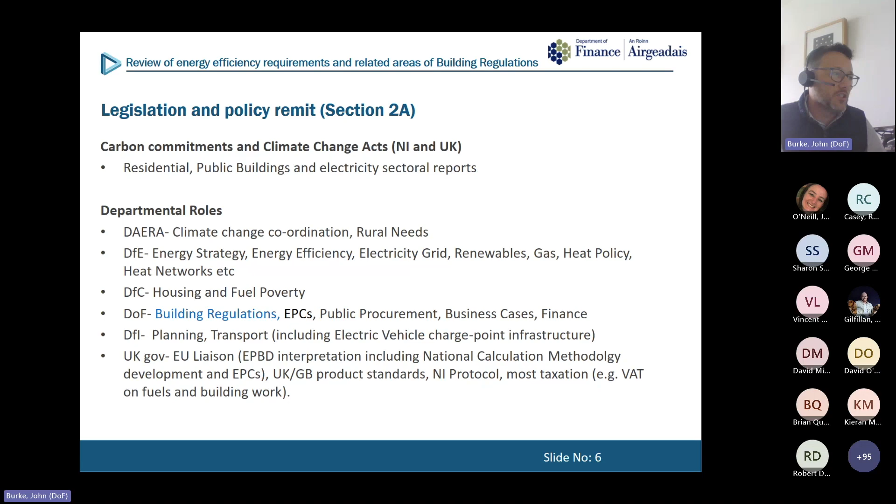So we sit in a kind of mixture of all of these policies and influences, and I think it's really important that that's appreciated by people when they expect building regulations change to occur. So our legislation only applies when building work is being done. That's a really important thing to remember. We don't require work to be done to bring a building up to a fitness standard. We don't require retrofit of a building to be done. What we require is, if you are doing work, that work is done to a certain standard. So that's a really important aspect of building regulations. They're not there to require existing buildings to be brought up to scratch. They only apply when building work is being done.

The remit is set by the primary legislation. So it's, again, standards which can reasonably be attained, and they usually set general functional requirements to be reasonable or adequate. And then the definition or the expectation or examples of what reasonable or adequate looks like is normally provided in the technical booklets. And those technical booklets form the day-to-day guidance that most of you, I expect, are familiar with.

Finally, they've also implemented aspects of the Energy Performance of Buildings Directive. That's a bit of legislation and that's been implemented via Part F. And some aspects of this are still to be provided, for example, a primary energy target, and they stem from an amendment to the directive made in 2018. But ongoing EPBD compliance into the future is no longer a requirement for the UK, having left the EU, and we don't expect that will be a requirement that will be imposed or applied here. So that's an important kind of thing.

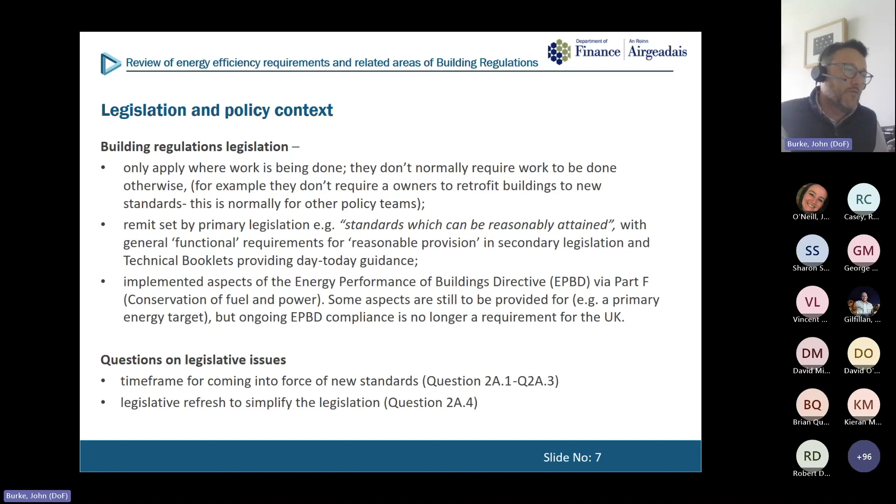So we have a couple of questions on legislative issues that I wanted to just take a couple of minutes to explore. They are the time frame for the coming into force of new standards and the issue about a general legislative refresh in light of those changes from the EU. So moving as quickly as I can, England applied quite interesting transitional provisions so that its new regulations came to apply to all new applications made after the regulations come into operation. So that first line is kind of normal. If you make your application after the new regulations come into operation, the new standards apply.

But the interesting difference with England's last amendment was that they also applied it such that all building work not commenced within 1 year of the new regulations having come into operation, whether the plans were previously submitted and approved or not, would also be subject to the uplifted requirements. So it didn't matter that you'd made your application a year and a half ago and finally got a plans approval. If you hadn't commenced your building within a year of the new requirements coming into operation, then you're expected to meet the new standards.

Now, that was done in the context, we believe, in England, where there were things like large site-wide applications being made for estates of houses, and provided one of the houses had commenced, that was the application commenced, and so the 200th house or whatever years later was still able to continue through the process under the first application, the standards from many years previous.

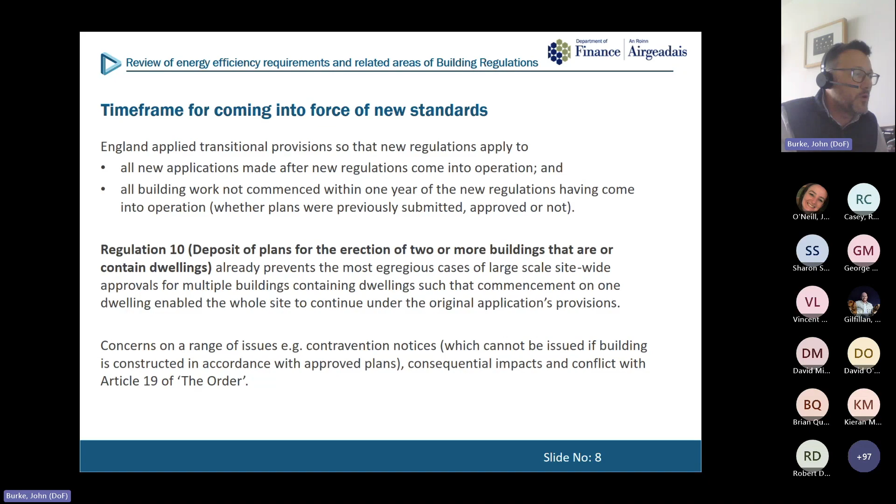So if the plans were approved 2 or 3 years ago but are only now commencing, then there could be difficulties there. We also think there are consequential impacts, and there's a general conflict with Article 19 of the Order, which I'd hope to come on to. So Article 19 of the Order, which is the primary legislation and sits above the secondary regulations themselves.

Article 19 of the Order makes it clear that district councils have the power, if the work hasn't commenced within 3 years of the receipt of the deposit of plans, to declare that the deposit of plans shall be of no effect. So effectively, if you make your deposit and then haven't commenced the work within 3 years, your application is void. You have to reapply, and that has been quite a straightforward concept.

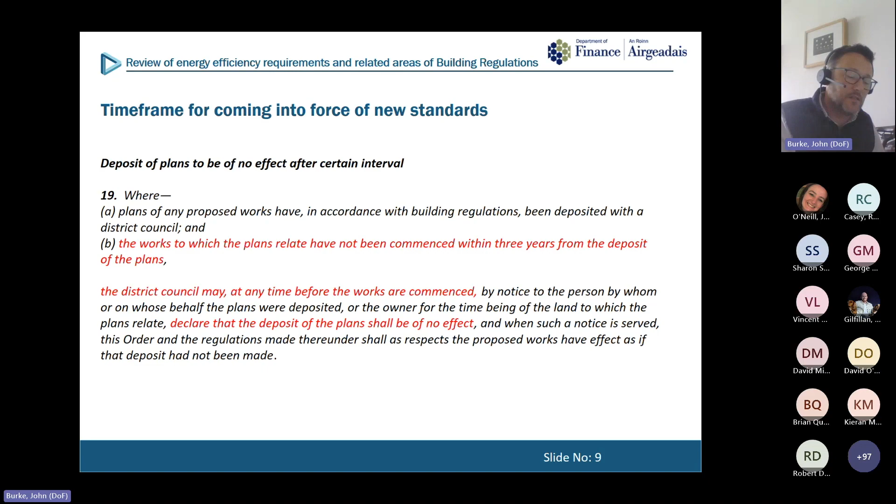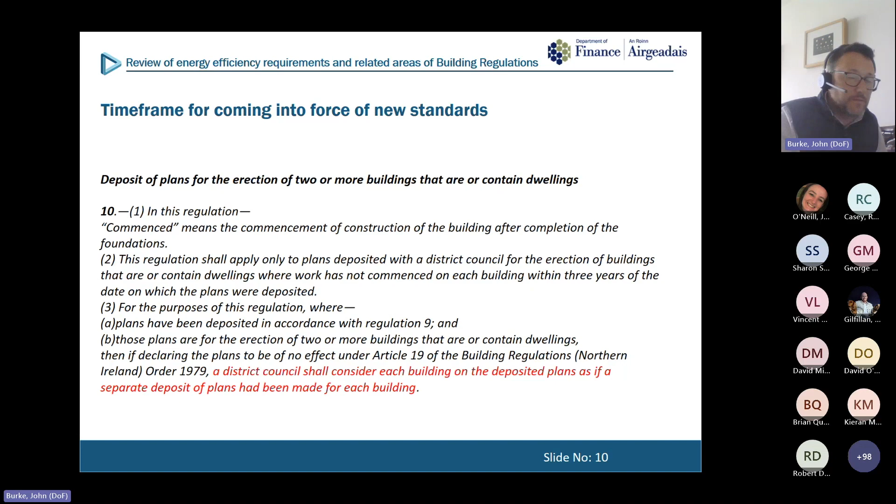And we're concerned that transitional provisions, as they were implemented in England, might conflict with this process. It would seem somewhat odd to have those two levels of legislation in conflict. And similarly, as I've said before, we've got this previous position under Regulation 10 that each building which contains a dwelling is considered a separate deposit for the purposes of Article 19 at the minute in any case. So we feel that gives quite a bit of support or protection on that front.

So our proposals in the document, which we're open to receive comment on, are that we should continue on the basis that we have, so that applications submitted before new regulations come into operation can continue under the standards that applied at the date the application was made, but that would remain subject to commencement within 3 years of the application. However, we would be open to considering if this 3-year time period should be reduced, and if so, to what. So we've asked questions around that, and we'd be really interested in your comments.

Similarly, we've had a bit of a look, and we think that there's a fair bit of scope for some legislative refresh on the regulations themselves. Particularly, there's a number there that come in through the EU and the various layers of EU, and the need to demonstrate a very rigorous transposition that is both fulsome but hasn't had any unnecessary gold plating has tended to lead to some slightly eccentric or complex wording in the outcomes.

So examples of that, if people have time to look at them, are Regulation 43A, consideration of high efficiency alternative systems, and Regulation 43B, nearly zero energy requirements for new buildings. In effect, they're requirements that now apply to all new buildings. So we don't really see why you don't just have standards for new buildings rather than explicitly taking out that wording. So we think that there's room for a kind of clean up on some of these issues.

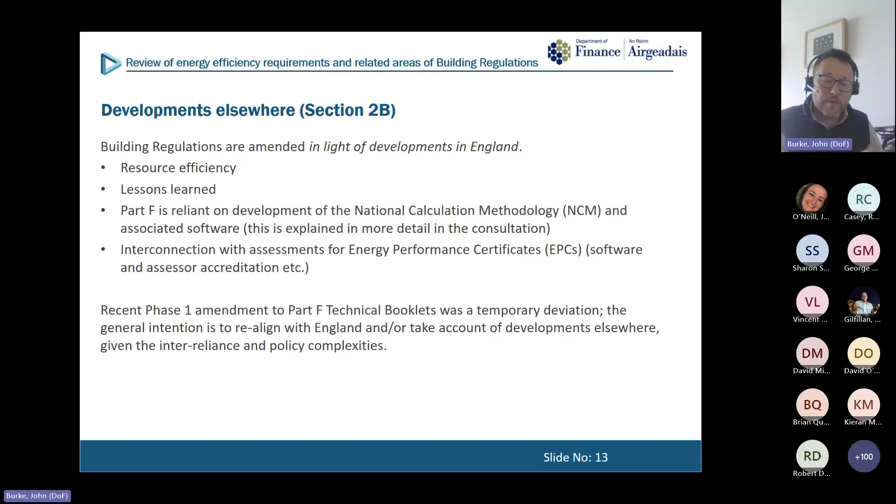The recent Phase 1 amendments that we made to Part F technical booklets really were a temporary deviation from this. It was in light of a need to do something urgently. It's not really a long-term or sustainable position to go off on our own track. And the intention is to come back and realign with England, or at least take account of England and the developments elsewhere, given the extent of the inter-reliance and the policy complexities that come, so we think it's important to emphasise that.

So we have some general questions then in section 2B that follow up on that, where we're trying to be sensitive to our local conditions. We note that it can be difficult to compare the actual performance depending what metric you use, whether you take account of local weather data and things like that, whether you have absolute figures. There's quite a lot of scope for variance. So we're interested if anyone has done any research, or if there is a true comparator that industry or academics have done to benchmark, using a rigorously consistent application method, buildings which would comply in the different administrations and how they perform.

We think that would be a helpful thing for ourselves to know, and to see what's actually been built as well. We'd also be interested in the characteristics of our local market. We outline in the document how we tend to have smaller developers. We obviously have a much higher level of reliance on oil, home heating fuel. We've got different ways of looking at fuel poverty, but we think we've a higher level of fuel poverty here as well. So we're asking about these issues, and if there are any other issues that we've missed in that filter that need to be considered.

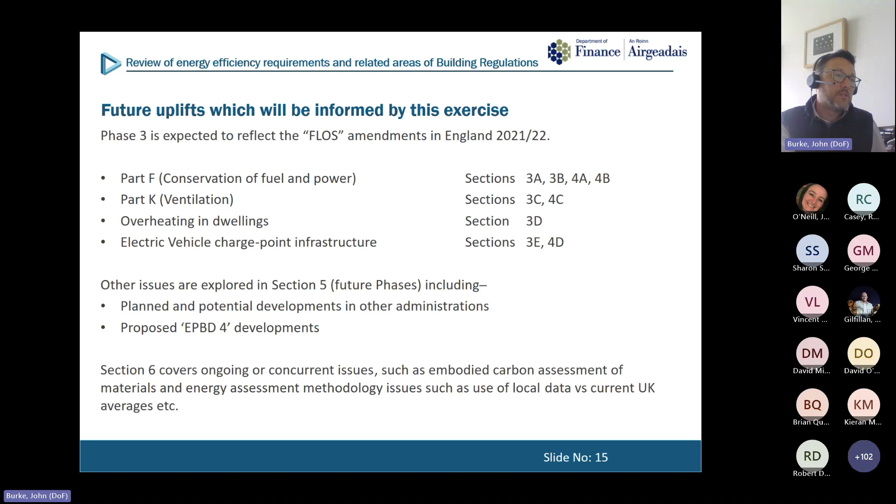Section 5 of our document looks at longer term developments, and section 6 looks at some of these concurrent issues that might be considered either in the longer term or alongside improvements in operational energy performance and improvements in the methodology.

So broadly, of course, phase 3 is expected to lower operational emissions in terms of Part F, conservation of fuel and power. Phase 3 is expected to lower our operational emissions, really start to significantly move us away from higher carbon fuels, improve energy efficiency of new buildings and update the standards where work is carried out to existing buildings, and make use of the new energy assessment methodology, which has come through in SAP 10 and SBEM version 6, I think it is, in England, and adopt those as they've now come through, and now that they're available, we can see what the impacts of them may be here.

So within that, however, under pressure from some of our colleagues in other departments and other places, we're also seeking evidence as to whether there might be an option to take some additional time and to develop proposals with the effect that new build homes, so this is dwellings only, would be limited to only very low carbon heating solutions. So there are two options in relation to homes. One is to broadly follow England or the other administration approach reasonably closely. And the second option would be to take a more radical step, take some more time, see if it were possible to develop an approach where we have an expectation of only very low carbon heating solutions.

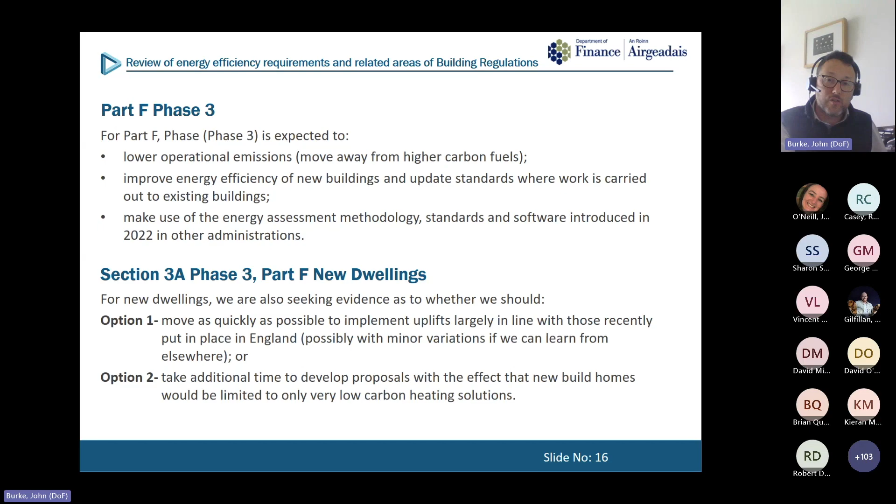With that in mind, there are two notional dwellings proposals in the document. So you'll see this table. I don't know if you can see my arrow, but this black column at the header is the existing kind of specification that we think would be a compliant specification that would work and would meet the current requirements under the last uplift that we introduced. And then what we have here are the proposed notional dwellings. It is the same fabric, and actually it's the same lighting standards as well for both options.

But one is a building which should be heated with mains gas and have wastewater heat recovery, and would also have photovoltaics on the roof. And that's in line with the option that England has adopted. So that would be a follow England approach, the light green, and it's option 1. Option 2, the darker green, is a heat pump led solution, and it aligns with a specification that England provided in Appendix D of their technical guidance, their Approved Document L1.

I mean, we have to say, please don't underestimate the challenges in any of this. There are huge challenges in option 1. One is obviously the removal of fuel factors is a big thing, so that even dwellings using a fuel worse than gas would now be 100% compared to gas. There would be no relaxations or fuel factor allowances which currently exist, which would effectively make it really very difficult for home heating oil or similar high carbon fuels to be used. And so that then has a fuel cost impact because the lower carbon fuels seem to be more expensive to use. So that's a really significant issue.

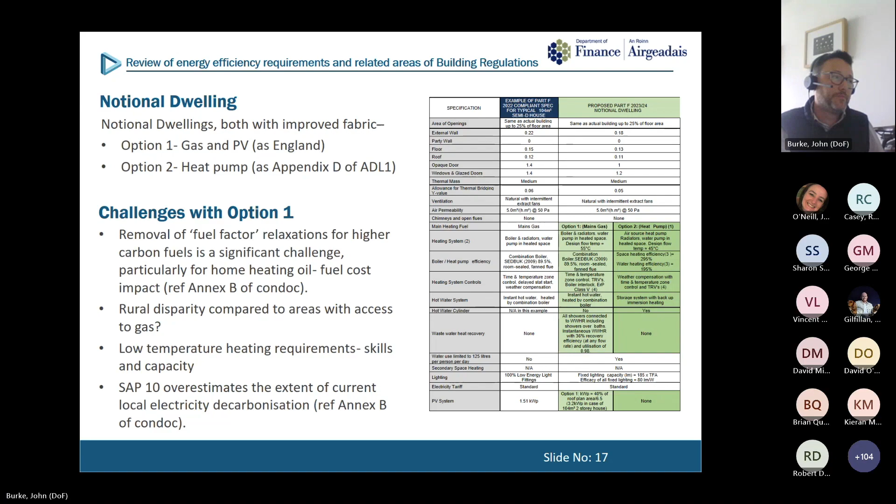So there are similar issues with option 2, but many of them kind of get magnified, and there are some particularly niggly or difficult problems that we would have if option 2 were to be taken forward. So obviously you have running costs, because low carbon fuels tend to be more expensive, even if you are running a heat pump. That's what we have found in our assessment anyway. We're open to evidence. CapEx costs, capital expenditure costs, tend to go up as well.

We've an interesting question about what the appropriate specification would be for a heat pump. I mean, maybe there's something there that we need to look at in what we've proposed, so keen to hear what you have. Industry skills and capacity pressures obviously increase because there's more new technology expectation in option 2 than there is in option 1. There are potential grid issues with all these heat pumps suddenly now coming on the market, particularly in rural areas, which would also apply in option 1.

There are contrasting pressures actually with option 1, because in option 1, the high amount of photovoltaics could lead to issues in gaining export back to the grid, whereas with option 2, the issue is with supply to keep the heat pump going, and for that to work whilst decarbonising the grid, so increasing the extent of electrical use whilst decarbonising the grid.

We worry that there could be unintended outcomes if you have a very low emissions target established by a heat pump-led notional dwelling. Will it be able to provide the level of cooling that's needed and still meet the target? Because you now are going to have requirements for cooling under the overheating assessment requirement, and that might, in some building types, in some flats and things, require mechanical cooling if it goes that way.

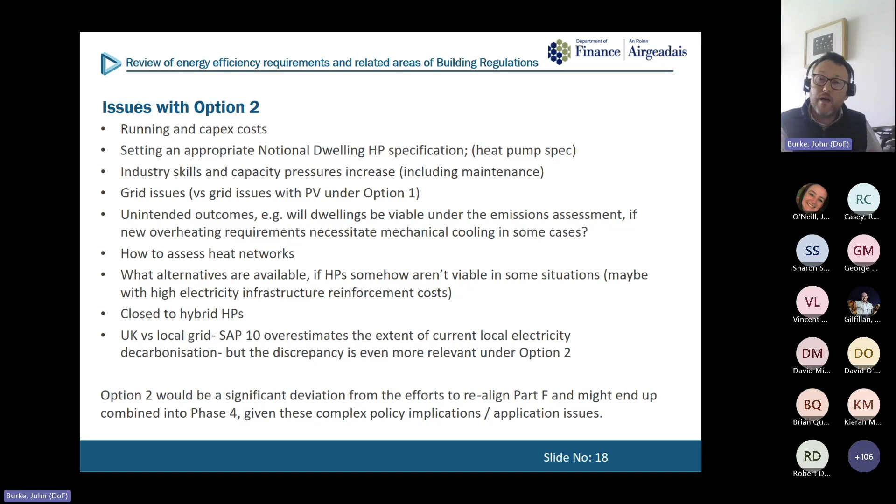So the other point to bear in mind is that option 2 is again a significant deviation from what's already in place in England. So I wouldn't want to underestimate the extent of work that would be involved in deviating away from where England were, or in following somewhere else. The more we can do that, the faster we can implement our proposals, and probably the more straightforward it would be for industry, because they'd be developing on what they would have learned from England, and that involves assessor training, all sorts of things, as well as practical application on the ground.

Okay, so those are the two notional dwellings that are considered. There are also new metrics that would apply across all options. So obviously the emissions metric still remains, your target emission rate and your dwelling emission rate. Obviously, when we adopt the new system, you would no longer need the manual alterations that we currently apply for NI assessments. There would then be a new primary energy assessment, and that's discussed in the document, a fabric energy efficiency standard assessment, a FEES assessment.

So that is really quite rigorous, because it's aligned with the notional dwelling specification, and it's quite substantial. That's quite tough. There are also improved limiting U values and air tightness standards, and improved limiting services efficiencies. We do discuss alternative metrics. So Scotland are looking at delivered energy as an important metric in their EPCs and in their building regulations. Wales, for example, have a running cost EPC band, which might be something that we look at, particularly if we come to look at biofuels and things like that. We'd have to consider that maybe.

And Ireland, of course, have a renewable energy ratio. So we've looked at it, and our thought was that the metrics A to E were sufficiently robust, but we're interested in your opinion on the rest of them.

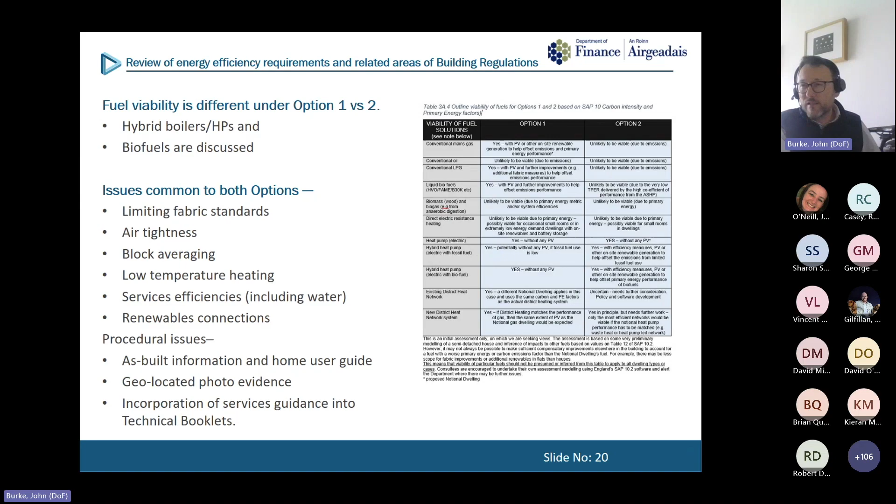So that's as-built information in the home user guide, geolocated photo evidence, and the incorporation of the services guidance, the domestic building or non-domestic building services compliance guide information into the technical booklets. That's all there. There's also an interesting annex, Annex B, which looks at sort of outcomes for a typical semi-detached house. Now, when we develop proposals further, we'll have to look at that at a wider range of dwellings.

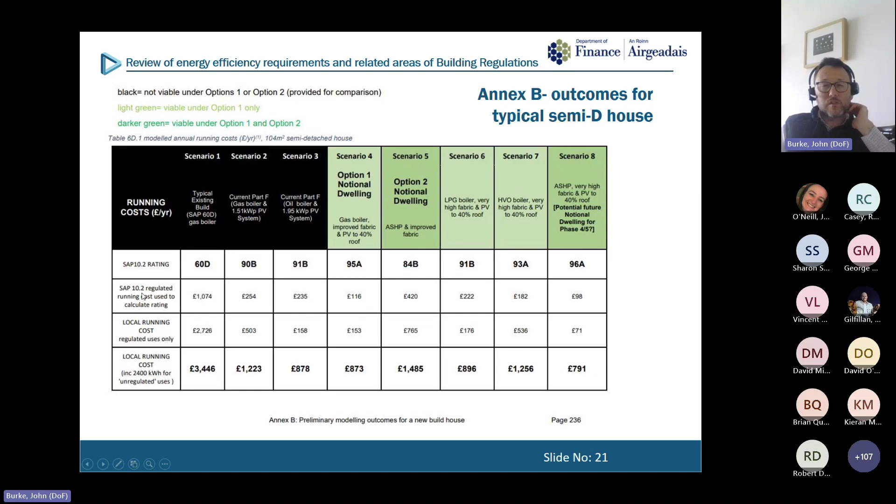And principal to that really is the photovoltaic array, which seems to be the very substantial figure. And scenario 8 adds that photovoltaic array and better fabric to try and bring that down, with the suggestion in our consultation that might be the basis or a starting point or a consideration for a future notional dwelling for later phases, for phase 4 or for phase 5. So that's kind of how that has panned out. But it kind of emphasises to us, I suppose, that the SAP 10 running cost assumptions really aren't quite up there. So we'll be looking at that soon.

So in terms of proposals for existing dwellings, these are much more limited, so it should be a bit faster to explain, hopefully. But if you're doing an equivalent target approach as an alternative way of demonstrating compliance for an extension or a material change of use, you'd now need to build in the fees and the primary energy assessment as well as the emissions assessment. So that would be there.

We're interested in trying to develop a better emphasis or a call for specialist judgment when dealing with traditional buildings and vapor permeable construction. We're looking at an uplift to standards so that new elements would be broadly similar to new build fabric elements, roughly the same kind of outcomes there. There are less significant changes to retrofit standards because we're worried about the risks of unintended consequences from moisture and issues like that. Services efficiency uplifts are there as well.

Big issue would be that replacement heating system. If someone's replacing their entire heating system, not if they're just doing a radiator, not if they're just doing a boiler, but if they're replacing their entire heating system, it would be expected to be installed with a low temperature system.

Similarly, what else have I got here? Yes, the new primary energy assessment. Yes, there would be a new primary energy assessment when you were changing fuel. So as well as the emissions assessment you have to do now, you'd have to do the primary energy assessment too, so that your new fuel that you moved to was no worse, both in emissions and in primary energy performance terms. And that wouldn't be applied where the heat loss of the dwelling was really very low.

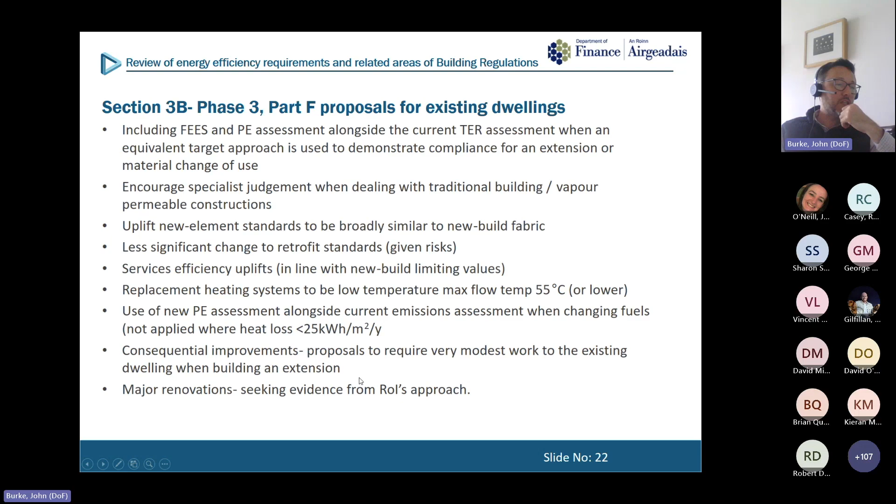We're sceptical on both of these kind of areas, although we do have a set of proposals there to learn from Wales, so that if you were doing an extension to a dwelling and the existing building needed loft insulation, cylinder jacket or cavity wall insulation, then you would really be expected to do that as part of the extension work. So that's been included there, and we'd suggest people look at that.

Moving swiftly on, proposals for non-domestic buildings then. We've got new notional buildings similar to the notional dwellings. However, in this case, we really are just looking at what's out there. We're not even suggesting that Northern Ireland has the scope or capacity to try and develop its own particular notional building, because the outcomes from that can be really very variable and complex, there's such a variety of building types and building situations to consider that we think that it's not really realistic for us to do that.

There is, however, a bit of a comparison provided in Annex D of England, Wales and Scotland's notional buildings, outlining what the differences they have, which are all relatively minor, dare I say, or seem that way at this stage.

We've got, of course, the fundamental change is in what your comparative fuel is between your actual building and your notional building. So a bit like the fuel factors that applied in notional dwellings, if you have a carbon factor worse than gas, you would be compared to gas. So again, in non-domestic buildings, you would find that you wouldn't be able to use oil or higher carbon fuels very easily, and that could be very challenging for you, and there would be similar impacts with primary energy as well.

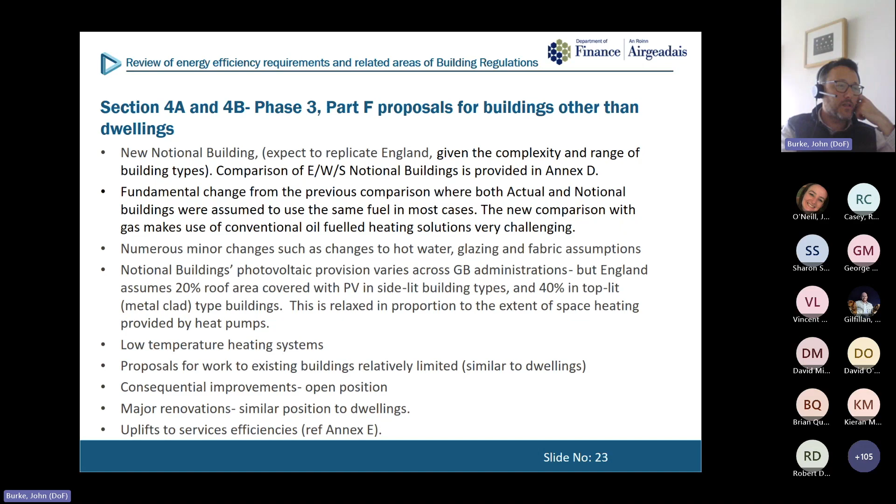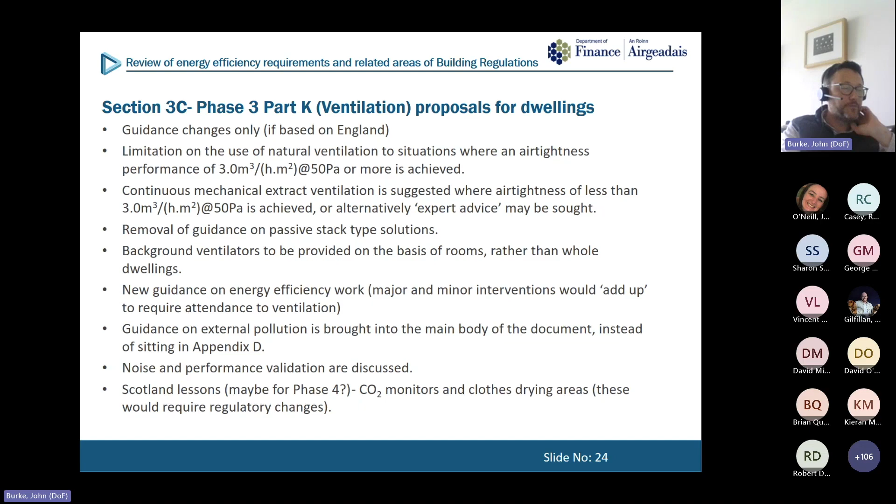And then the other more long-standing measure that they have in Scotland is a more dedicated allowance for clothes drying areas. And with our particular kind of damp and humid environment, with cost of living crisis and people not maybe able to use tumble dryers and things, we wonder if there is maybe scope to think about things. But we do note that requires regulatory change. So that wouldn't just be guidance.

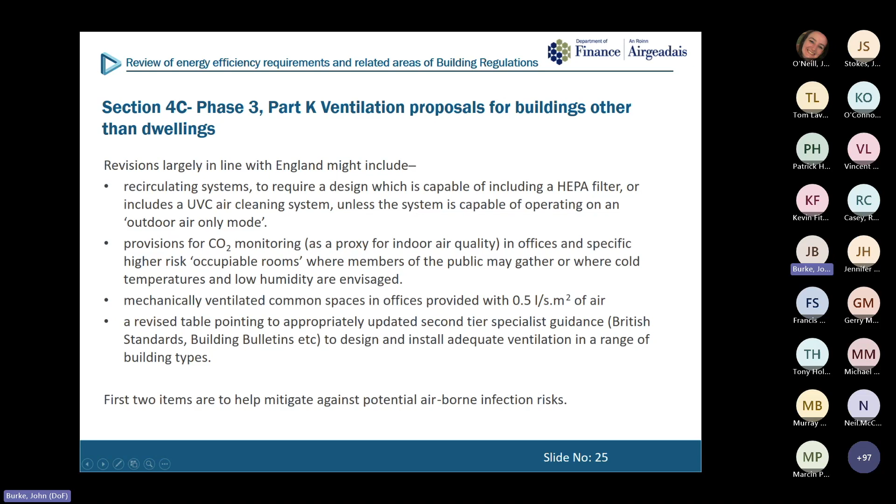Ventilation proposals for buildings other than dwellings. Again, largely in line with England, but this time they're looking more on the health side of things post-COVID. So there's stuff about recirculating air so that it isn't recirculated round and round if there's a particular crisis. So the issue here has been more related to airborne infection and improving the air quality in buildings, and there's a revised table of standards on that and reference to building bulletin documents and things like that. So that's where we're at. That's what's going on in that section.

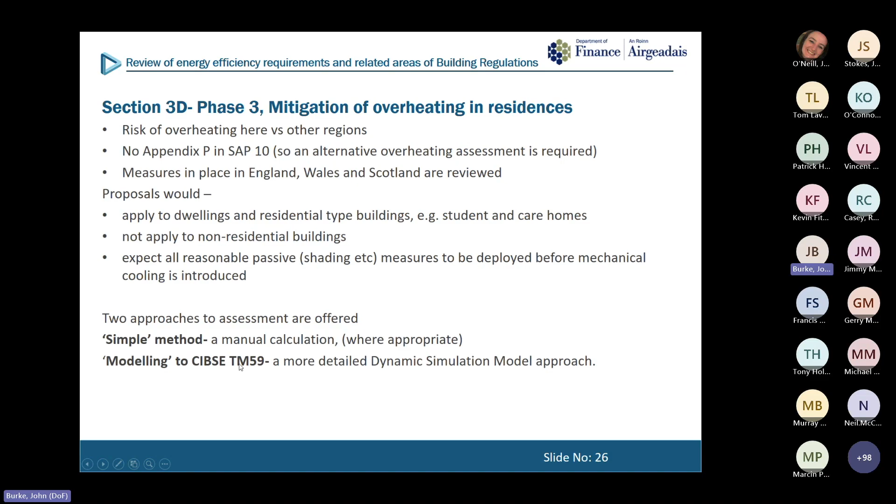Having reviewed all of this, the proposal put forward is in line with Scotland's simple approach, which generally, if you've got a cross-ventilated building and you don't have too much glazing, less than 20% of the total floor area of the room, would mean that you could have openable windows similar to those required for purge ventilation under current Part K. So we think that's a simpler assessment than the proposals that have come through in England. So we're advocating that, and we'll see what the feedback is.

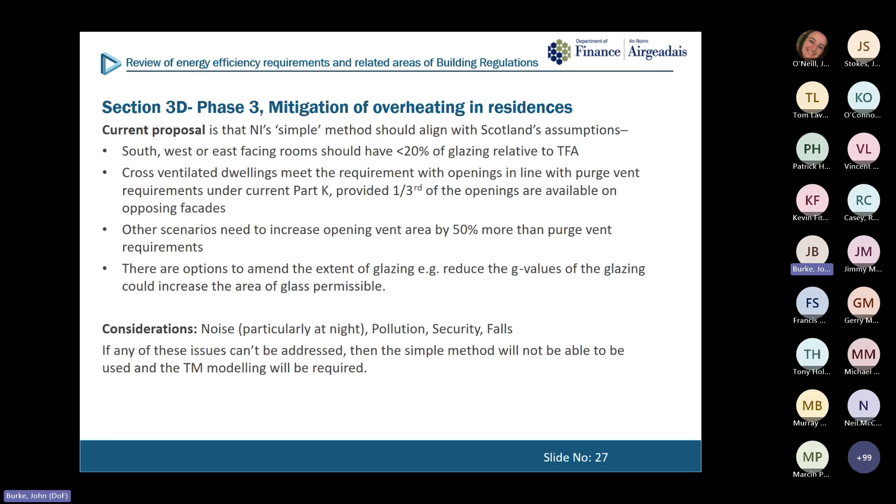The issue though can be the other considerations like noise, pollution, security and falls. And if any of those can't be addressed or are an issue at the building, then you probably will have to use the TM modelling method. The TM modelling method has a criterion A and B about nighttime temperatures in bedrooms and things, but it's quite specialised. So there's quite an onerous effort involved in trying to remodel that and check that overheating isn't a substantial risk or is dealt with successfully and hasn't breached the two criteria.

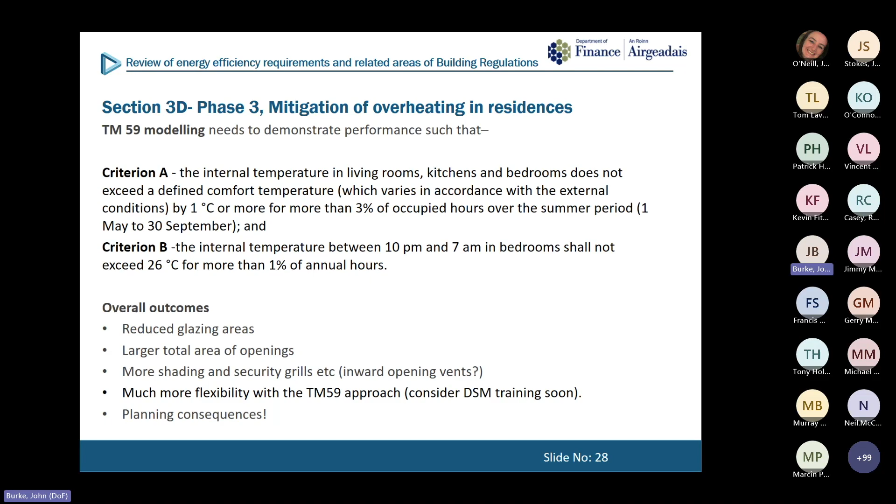The overall outcomes are things like reduced glazing areas, larger total openable areas, so more risk of falling out and things like that need to be watched. More shading, more security grills then to try and be able to get the openable areas to work at night time and things like that. The TM59 approach, from what we're hearing, offers much greater flexibility for designers, so it's probably worth getting the relevant training for that. But there could also be planning consequences. Having got a design or a building to look a certain way, you then find actually that for this to meet these requirements, you have to take other measures. So we're concerned on that point, or raise that point and let you know about it.

There are also proposals in the document for phase 3 in relation to EV electric infrastructure charging. These follow up on some requirements from the EPBD, the Energy Performance of Buildings Directive, which still need to be implemented here. It's really a matter for the Department for Infrastructure, who are leading on it, but other administrations implemented it through building regulations, and the previous ministers were minded to do so here. We're aware that England has chosen to go further than the EPBD and required charge points rather than just the infrastructure, just the ductwork, at all new houses that have a parking space associated with them.

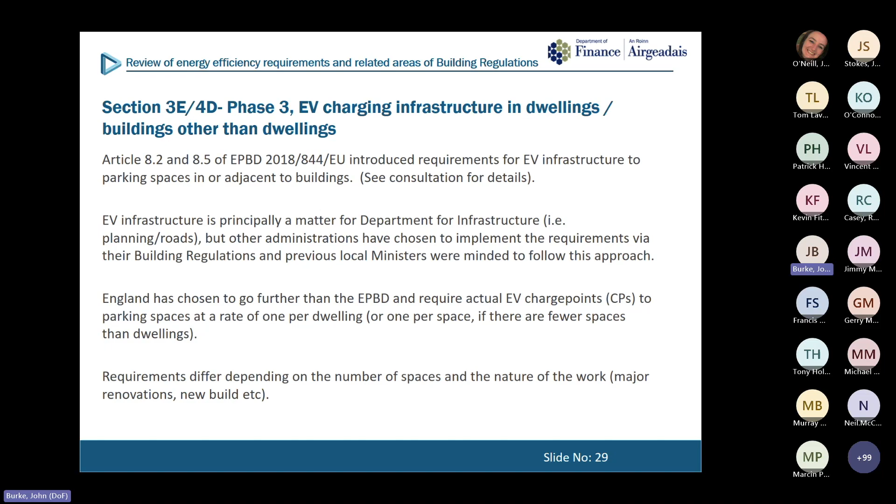And the requirements differ. The requirements from the EPBD are quite complicated to try and work out. There are lots of thresholds, like 10 car spaces, certain requirements apply. In other situations, other things apply. So there's quite a lot to that, and it needs quite a careful and forensic review. So these are some of the issues that we've listed. I'm concerned on time, so I'm not going to go through them all now.

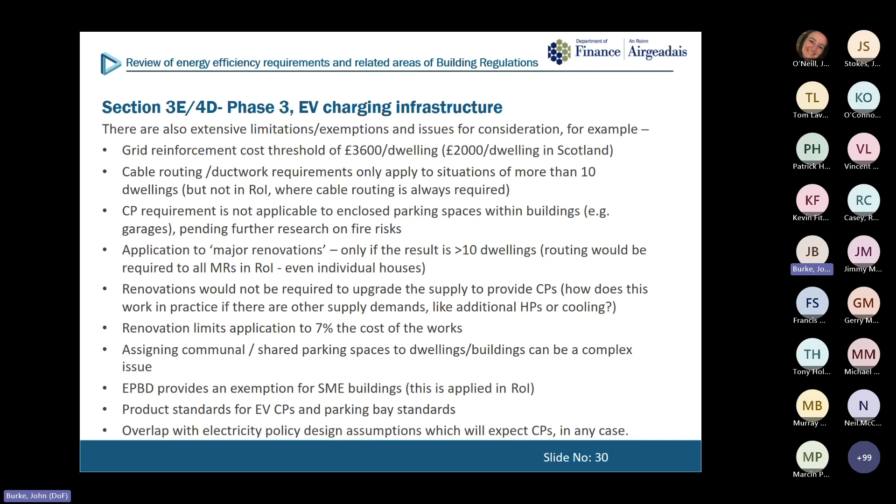But you've got things like the renovation. Well, for a start, there's grid reinforcement cost thresholds. So if the work would need grid reinforcement and that grid reinforcement was expensive, you might find that you were able to be exempt from the requirement, but you've other things to do then in consequence. So it's not a straightforward policy proposal, but it's outlined in the document, and we'd be keen for your input on that.

Phase 4 and phase 5 are considered in section 5, outlining some of the current influences. That includes England's Future Homes and Future Buildings proposals, and the consequential national calculation work. It deals with Scotland's ban on direct emissions heating, which is a really significant manoeuvre. So nothing that combusts anything at your dwelling would be permitted from April 2024. I think it's actually all new builds, dwellings and non-domestic. So you'd have to have a heat pump or connect to a district heating network or have direct electricity.

That's your solution there. And Scotland's commitment to a Scottish equivalent to Passive House from 2025. So we're trying to engage on that and see what's happening there and how effective that might be. But that could be an influential manoeuvre here in subsequent phases.

Boiler and UK product standards are a relevant influence because there are consultation proposals out suggesting that boiler replacements should be at least a hybrid level of performance. So that would increase to better than 100% efficiency because they would use a heat pump effectively. There'd be a heat pump and boiler combination, and that might help mitigate surges on the electrical system or the overall electricity load, so that peaks could be dampened out with the alternative fuel.

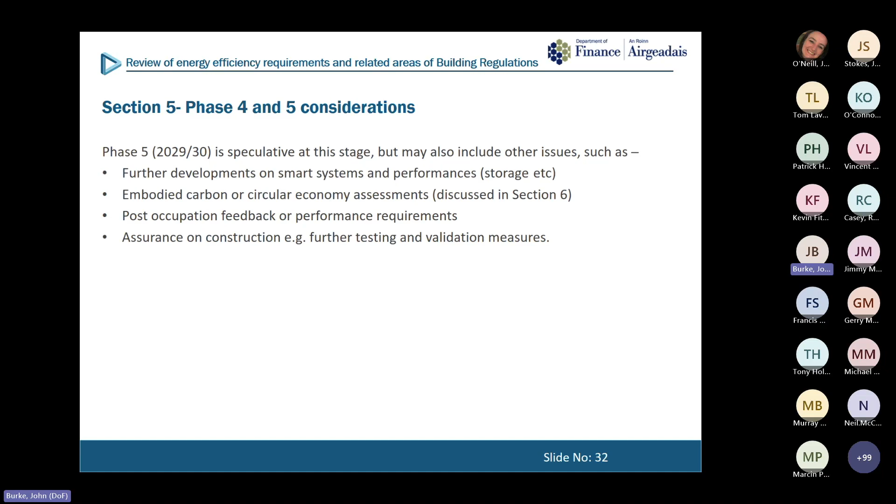Phase 5 is really speculative at this stage, but includes other potential issues, which we'll go on to talk about, but more on smart systems and performances, more emphasis on storage. That might become part of the notional building specifications, that you have an element of storage to accommodate that, or a metric for that. Embodied carbon is another issue that we discuss later. There might be stuff on post-occupation feedback or performance requirements or assurance on construction, such as further testing and validation measures. So again, these are issues that crop up in section 6, and we'll come to that.

So there's also concurrent issues. Some of these issues are concerns that people have now that need to be considered, and might influence future developments as well. So one I've mentioned before is current grid factors, and there's a table in Annex B which looks at that, and you'll see different figures there depending on whether you go with the SAP or Ireland's assumption or Northern Ireland's actual carbon estimates. You get quite radically different carbon outcomes for the buildings.

So actually option 2, because it's using heat pump electricity, performs worse than option 1 under Northern Ireland's estimate, but would do better under Ireland and much better under the SAP assumption. So as the grid decarbonises, you get less benefit for the electricity you've exported back. But it's worth noting that SAP isn't necessarily giving you a true representation of your actual performance in our local conditions. But to develop a whole new local SAP for us would be a really significant undertaking. But it's something we need to be aware of, so that's something we're mindful of and raise.

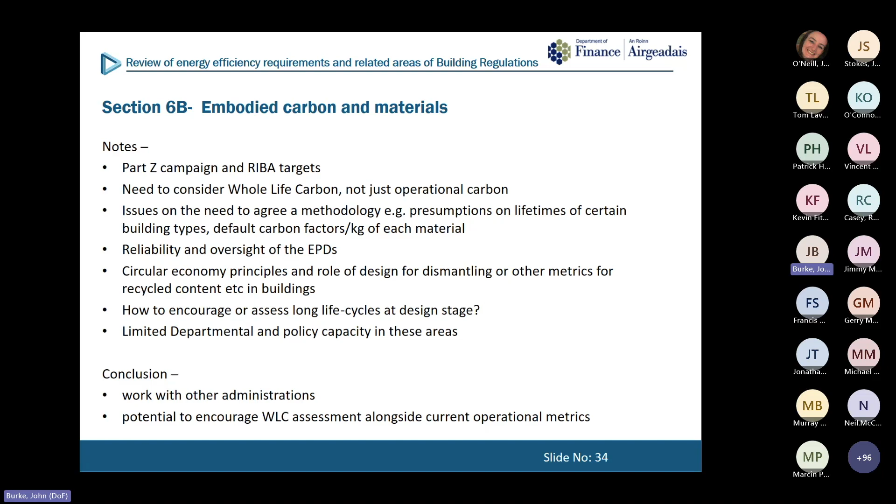We have a section with a bit of concern about potentially oversized new homes. There's little point in us improving our emissions performance per metre squared if we build many more metre squareds than are necessary. Every additional metre squared built is adding to the emissions, unless you've got a carbon negative building, which we're not really at. So that's an issue that we think is reasonable to talk about, particularly because there's some Northern Ireland data suggesting a significant proportion of our detached homes are really very large.

And then we've also got a section looking at whether there is something we could do or learn from to improve the performance gap, for example, additional testing or validation or commissioning that might be cost effective. So we ask these questions and we wait to see what comes back. But these are long-term, concurrent, parallel issues that we're aware of that are influencing all phases, and we'll see what we can do to try and work with that.